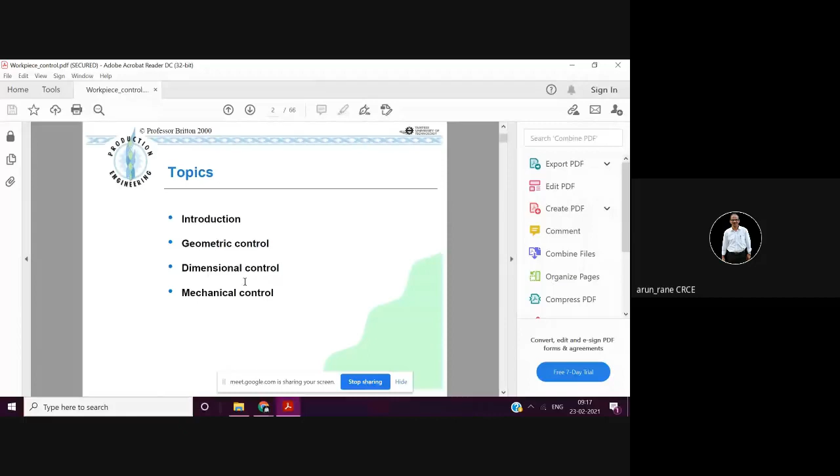So what are the functions of workpiece control? This means how you are going to control the workpiece - for example, how you are going to clamp your workpiece on a lathe machine, or on a milling machine, or on a drilling machine. This is what is called workpiece control.

Even on a lathe machine also, whatever jobs you are loading, first job, second job, third job, should come at the same position, and that's why you have to do proper fixturing.

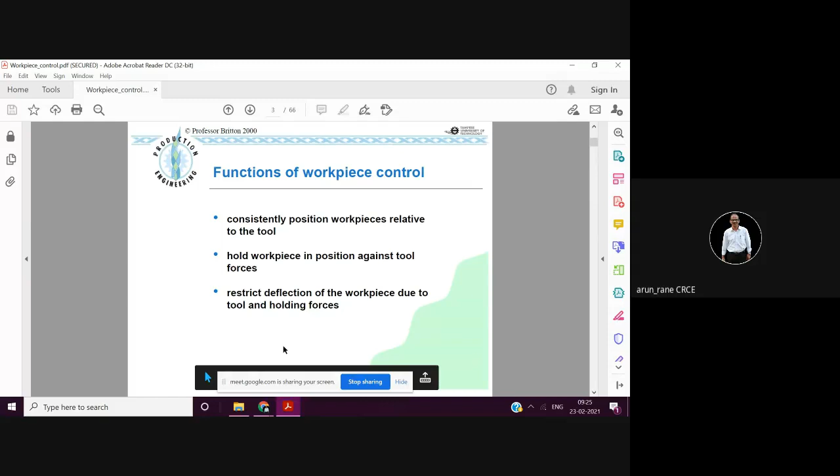What is a locator? Suppose if you have done boring, say 25.00 plus 0.02. If you have done this boring, then this bore can be taken as a reference when doing the subsequent operation. At that time you have to locate that bore.

Clamp is whatever clamps you are using, like strap clamps, etc. - that is your clamp. Support means you are giving support from the bottom. Suppose you have a plate and you want to drill 10 holes in it - you cannot keep that plate directly on the table, because your drill will go and touch the table. People, in a hurry, have drilled the tables too.

So in that case you have to keep your plate on the table with the help of the parallel block, meaning you keep the parallel block below the plate so that the holes are cleared off. There's a gap between the table and the plate because of the parallel block. At the same time, ensure the holes don't open out in the parallel block, otherwise your drill will hit it. It won't damage the parallel block since these are hardened and ground, so your drill will be damaged instead.

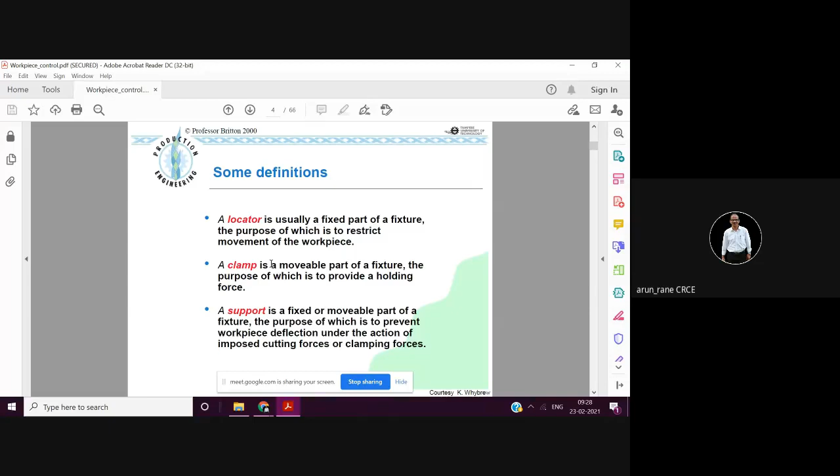Now you will get a clear idea, and that's why I have uploaded assignment number 2, which is preliminary part print analysis, where step number 6 is important - identifying locating, clamping and supporting surfaces. So this is your support surface, here you are supporting. Then this is your supporting as well as locating surface. You will also have a cylindrical pin inserted in a plate, and your workpiece touches it, so it acts as both a support and a locator - the workpiece gets located against this cylindrical pin.

As well as your workpiece is resting on the table, so this surface acts as a supporting surface and this surface acts as a locating surface. There is a clear difference between a location and a support. And of course clamping - in this case the clamping will be from the top. So for this particular case, my supporting surface for the workpiece is this, my locating surface for the workpiece is this, and my clamping surface is this. It's very clear.

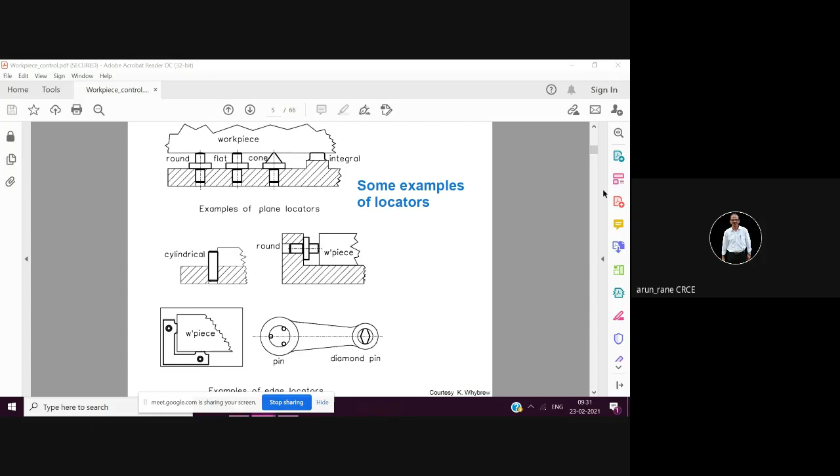Somebody is trying to join, I think.

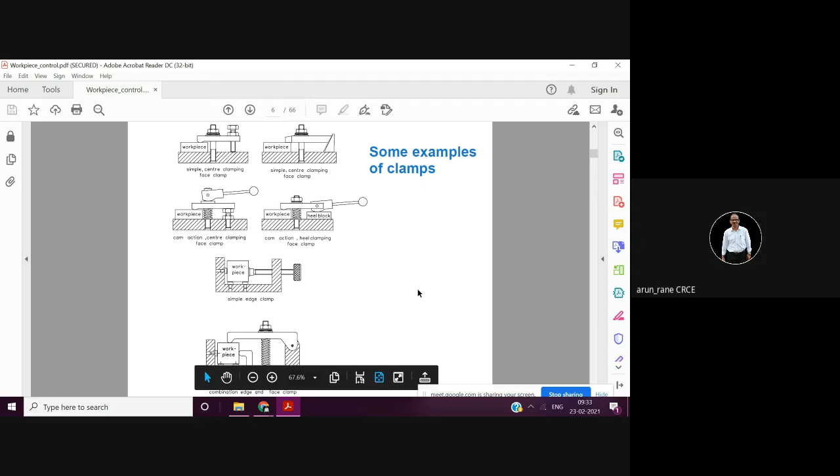Then you have a simple edge clamp. This is your face clamp again. This is your heel clamp, heel block - it looks like a heel. Then you have edge clamp and face clamp. This is again a part of your jigs and fixture studies.

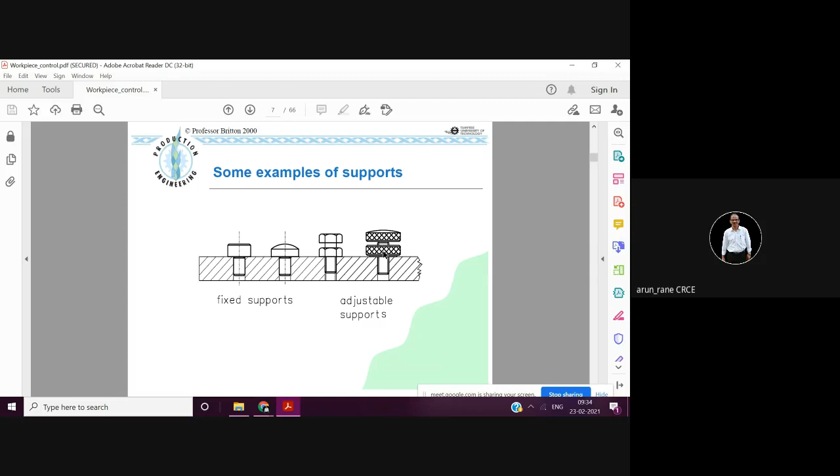Fixed supports. So you have fixed and adjustable supports. Fixed supports means from here to here this height is fixed. Adjustable supports means this bolt can be moved up and down if there is a variation. That's why it is called the adjustable support.

Then these are some symbols which will be used regularly. This is the symbol for the locator. This is a symbol for the hidden locator - like suppose the locator is on the back side and you can't see it, so that time you have to show it by a dot. So that is the locator which is hidden or which cannot be seen.

Then normally we don't use this. This is the view of the locator in front of the workpiece. This is generally not used. This is used, this is used.

Then this is a clamp, isn't it, with a filled arrow. Then you have clamp and locator - sometimes it can locate as well as clamp also. Like a three jaw chuck - we all know the three jaw chuck. So what is the function of a three jaw chuck? Whenever you are moving the chuck key, all three jaws come inside simultaneously.

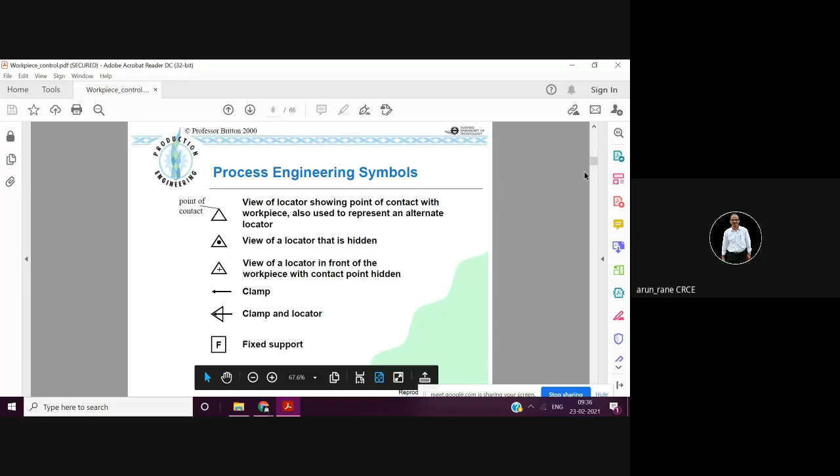So this is the symbol for this. Then you have fixed support and you have adjustable support also. This is a symbol for fixed support, and this is A meaning adjustable support and F meaning fixed support. Adjustable support and fixed support - you have seen this is fixed support and this is adjustable support.

These are examples. This shows how many locators are here in this case. Locator at the side of the workpiece, and locators behind the workpiece, and this is at the bottom. So these are three blocks - one, two, and three. This is a single view only - this is a top view, this is a front view, and this is a side view.

So how many locators are there here? Can anybody tell me how many locators here? So these are six, right - six locators, and six total pins. Here there are six locators.

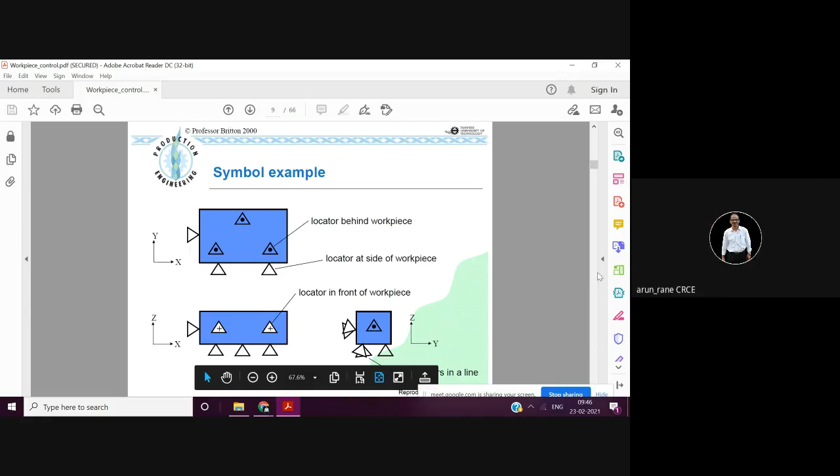So geometric control deals with the stability of the workpiece - that the workpiece should not vibrate. Suppose if the workpiece vibrates, then that will create a chatter mark. So please keep asking, that encourages me.

The position of the workpiece in the fixture is defined by a number of locators. So if you want good geometric control, your workpiece should not vibrate, then your workpiece should touch all the locators properly. It's not that it touches one locator and there is a gap at another locator - then your workpiece will vibrate.

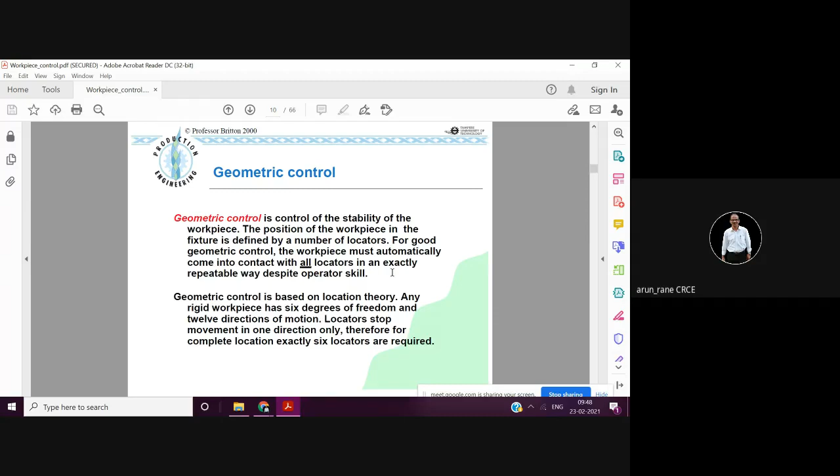So this is based on some location theory, like suppose this is - now you can see. Suppose if your holding force is in this direction, then your locator has to be in the opposite direction. So the locator will prevent the translation in that direction.

Locator prevents the rotation in clockwise direction. You have to have the locator located in such a way that rotation is prevented. Here holding force is in this direction, so this component will rotate like this. So you put a locator like this, so the component will not rotate.

This means the force is not in the center line. So it will have a moment, isn't it? Moment is equal to force into this distance. Because of this turning moment, this component will rotate in clockwise direction. Now, since we have this locator here, it prevents the rotation in clockwise direction.

Since in the first case, the force was in the center line, the moment was zero. So it was only a linear motion, only a translatory motion. So you have to apply the locator like this. Clear?

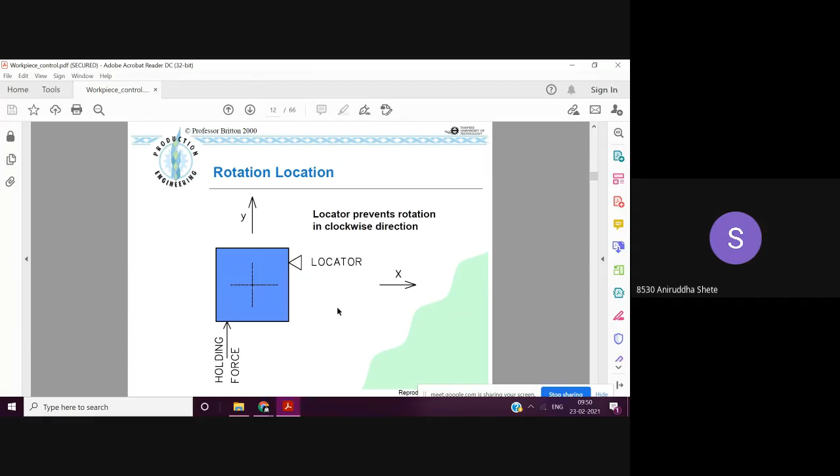So these are the six locators to locate a cube. This one prevents motion in the minus z direction. Then two prevents, three prevents, four prevents. So one is this one, two, three, four, five, six.

So this is the 3-2-1 location system, again a part of jigs and fixtures. Six locators are necessary to completely locate any rigid body. These are the axioms, meaning rules. Rule number one: six locators. Any locators in excess of six become redundant. Redundant means extra, and it gives rise to uncertainty in location.

Second rule is three locators define a plane, isn't it? For a plane to be defined, you need 3 points. A corollary is that it is impossible to simultaneously locate two planes on a workpiece. Then only one direction of each degree of freedom is located. Each degree of freedom has only one locator. That is rule number 4.

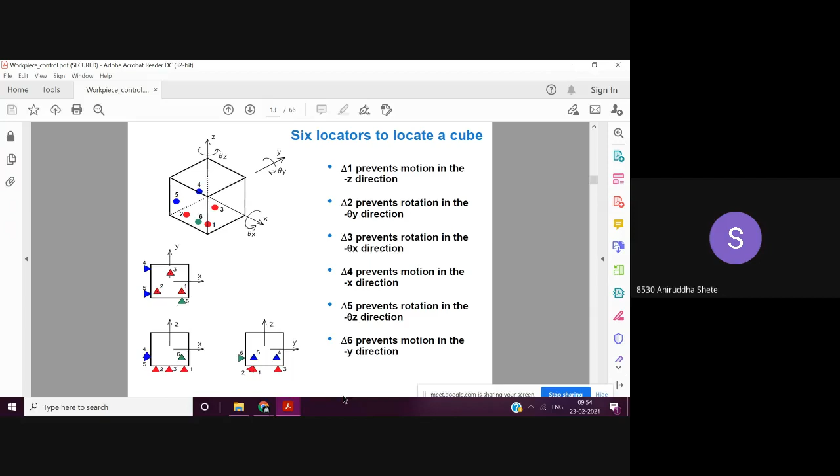Two planes - like this, the effect of using two planes to define a plane - like this, and this, and this. So this dimension varies between the parts, and this results in different part orientation. So this is not fixed.

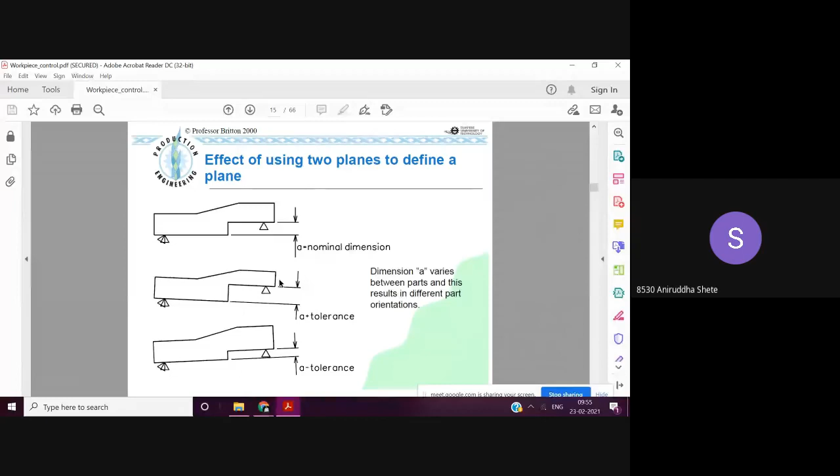Now, it is acceptable to use two different surfaces to define a plane. Coplanar surfaces should be created by one machining operation, that is planar. Usually, if you are going to locate on a surface, that surface has to be flat and machined properly. It should not be rough.

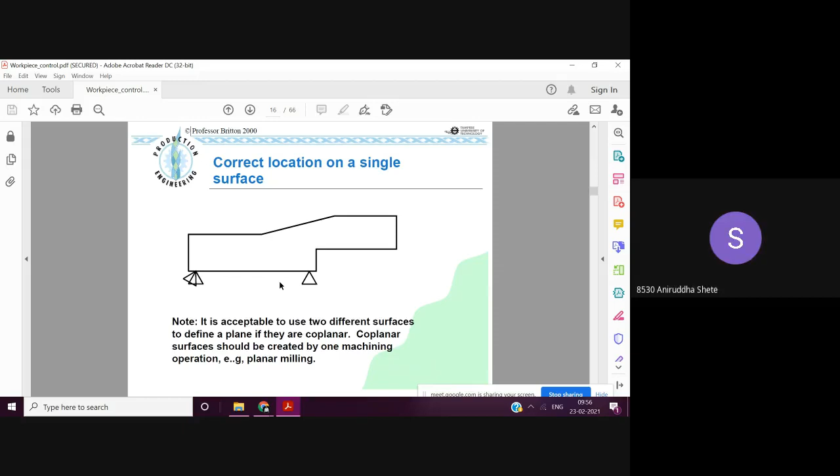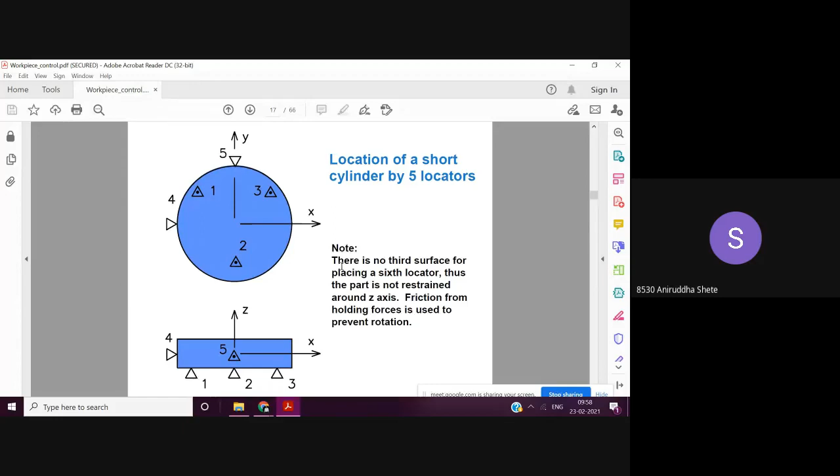These are some components, showing how it is being located.

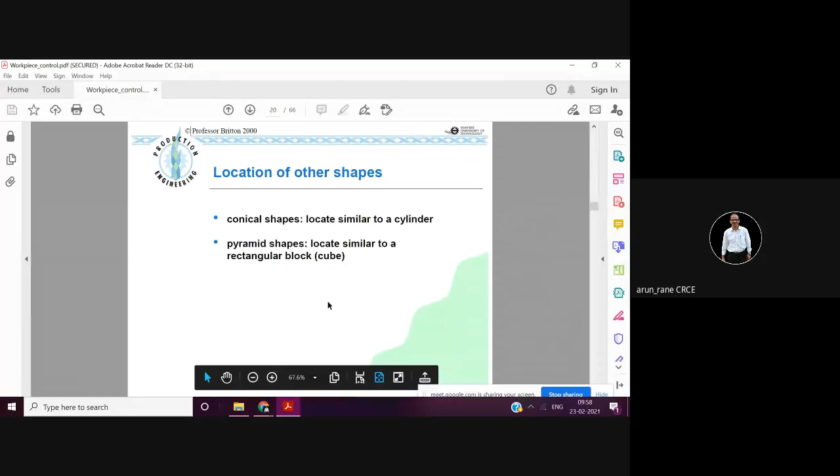Then how to locate different shapes, conical shapes or pyramid shapes. These are some complicated components.

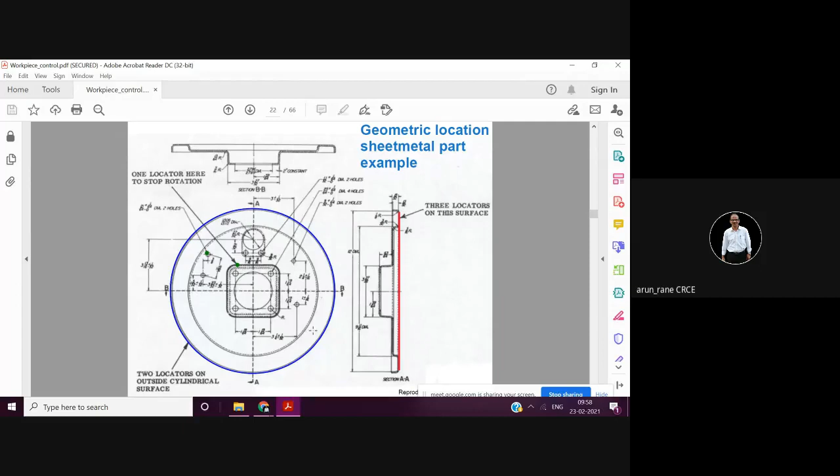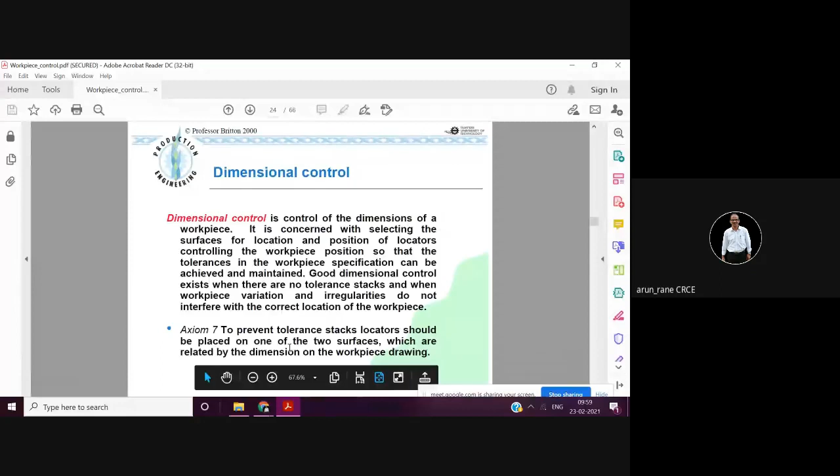Was your geometry control, and then dimensional control. Fine, so this we can take up tomorrow, that is how to control the dimensions, and what is your center line theory.

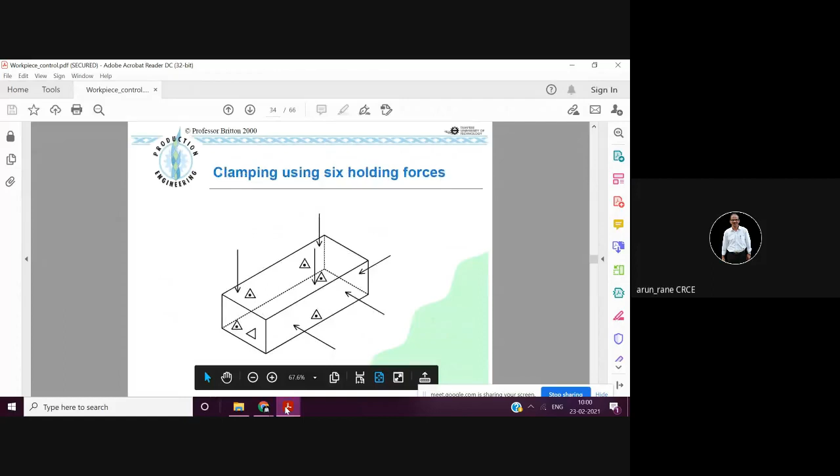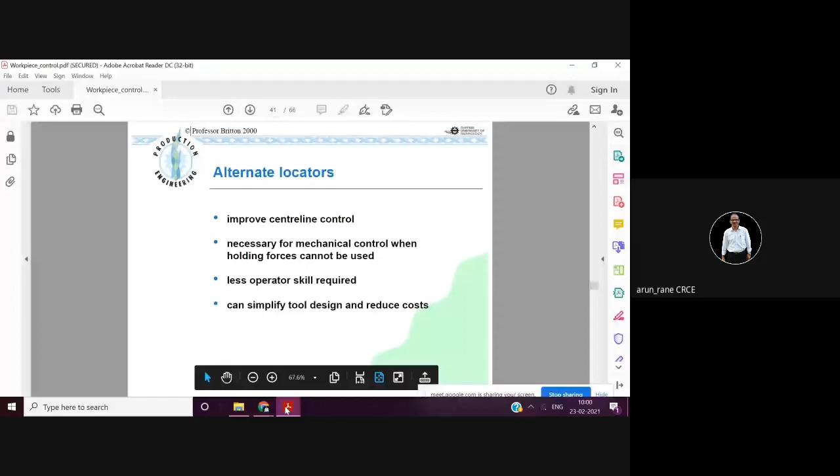The manufacturing engineer is the supervisor over production. His role is supervisor, that is he has to see that the product is made, he has to see that workers, every worker is allotted work, he has to see that raw material is available.